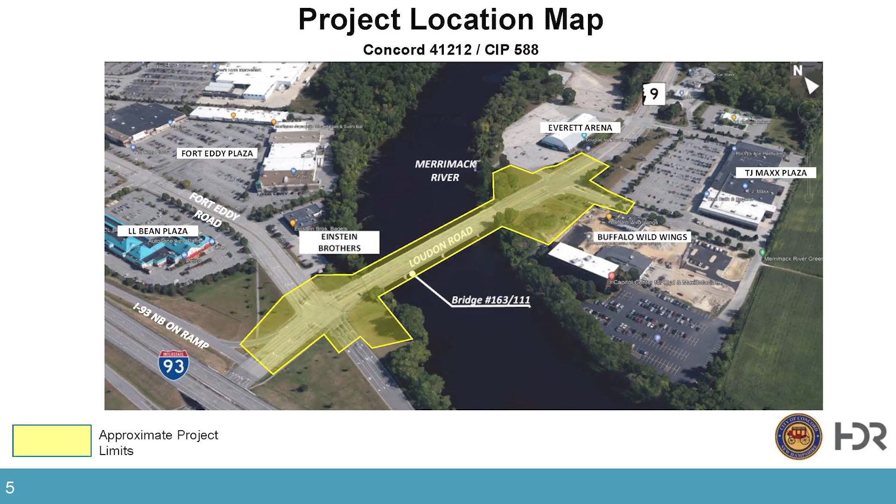Again, I mentioned the purpose and need - it hasn't changed from our last meeting. We're addressing structural deficiencies; it's what we call a red-listed bridge, and it's been red-listed for a number of years. We want to address the deficiencies with the structure itself. There are also operational deficiencies with how the traffic is working, and we want to address that.

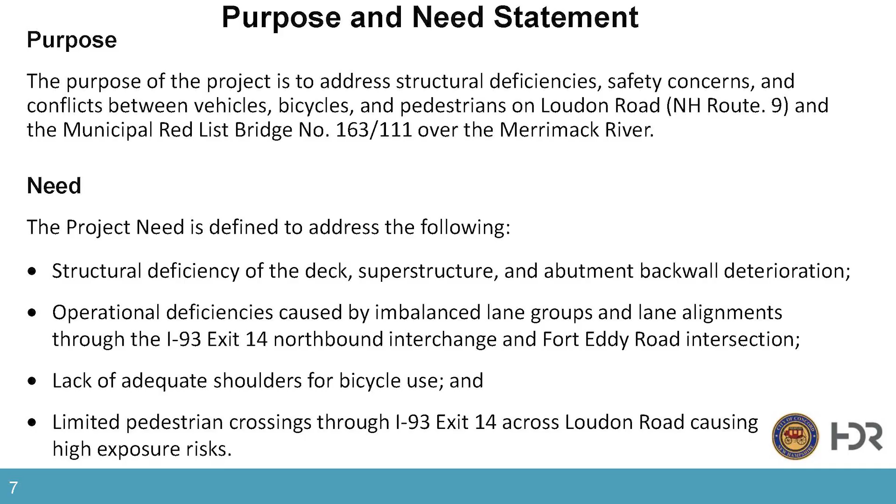Then there are pedestrian crossings currently across the bridge - we have sidewalks, but we want to improve that. We want to improve the bicycle use; there aren't really bike lanes at all, so we want to provide for that. There's also the Merrimack River Greenway Trail that you may have heard about, and we want to provide a connection for it. You'll see that as we get into the design tonight.

So with us tonight from the city, I'm here. I also have a transportation engineer who works with me and the city - she's not here tonight, Karen Hill. And Tony Punton is here with the DOT - he's our project manager, and he's been very helpful as we've progressed through the design to get it to this point.

We also have our design consulting team with HDR. Rock is here - he'll be standing up in a minute to give the rest of the presentation. Keith Coda is here, Nick Karen is also here, Phil Fusco is here, and Kevin Slattery, as well as others on the team here that aren't necessarily on the slide. Audrey's here too. Those are our leads and primary folks heading up the different aspects of the project.

So now I'll skip forward through what we already talked about and get to the project development process. And this is the point where I'm going to hand it over.

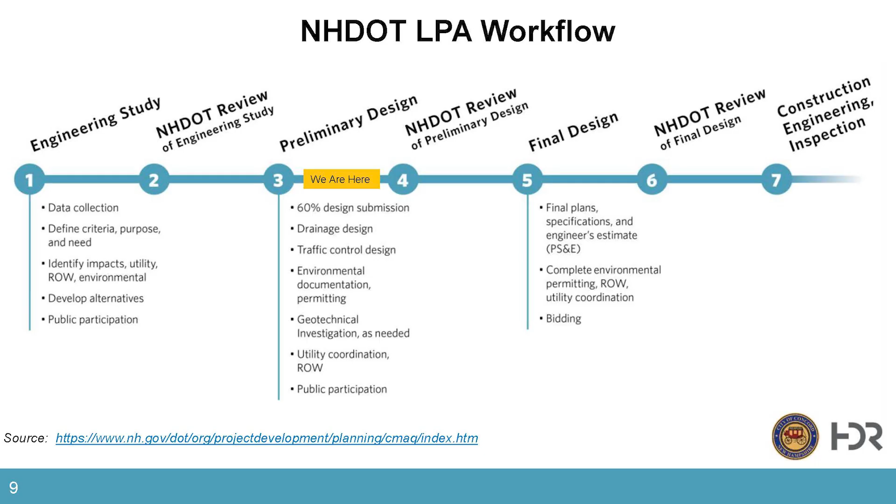You can see all the way up through step 6 and 7. Construction comes way later. We still have to finalize the design here.

So where we are in the project development process, we've already done all of these things up here. We've collected and analyzed all of this data. We developed the draft purpose and need statement that we presented at the first public information meeting. We developed the range of alternatives that we presented at the last meeting. We got input from you folks back in March.

And we've evaluated potential environmental impacts for the alternative that we're moving forward with, and that is still underway as we're going on right now. We'll talk a little bit more about that.

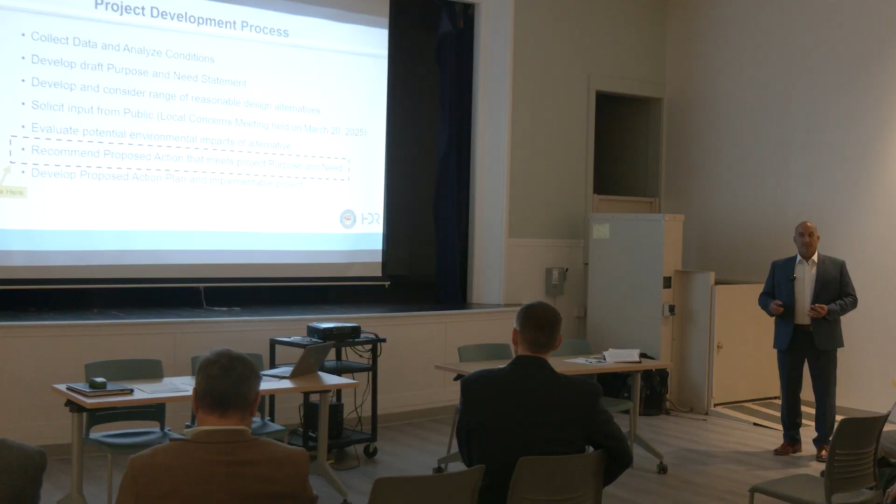So tonight we're looking at the recommended proposed action plan, and that action plan has to meet the purpose and need statement that was developed and presented last time we met. I think one of the things that I want to focus on in that purpose and need statement is a big part of it is enhancing to meet the goals that the city has put out there.

There's a lot of exciting things that are happening as part of this project, and one of those, or a couple of those, are improved multimodal access for a lot of the bike and ped community, improved safety with some shoulder widening, and just enhancements that go into a project like this.

All that said, this is a bridge rehabilitation project, so there's not a lot that we're doing outside of the footprint of the bridge, as Mike said, but we're doing what we can.

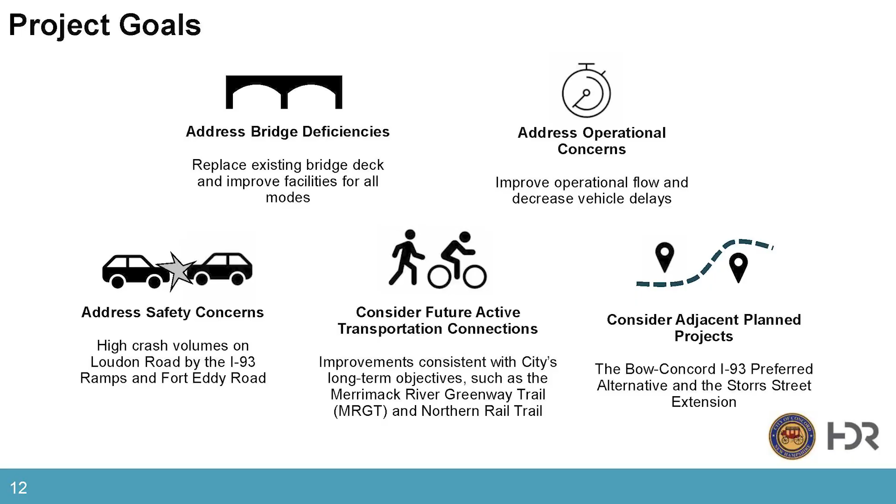So here's where we've been since March. We met with the Bureau of Traffic in August. We talked about some signing improvements along the corridor, showed them what we were going to be doing. There's actually going to be some overhead signs put in adjacent to the bridge, on the eastern side of the bridge.

Coming out of that, we've met with the city on the water line improvements that are being planned as part of the project and that are going to go across the bridge. Section 6F meeting with the city, natural resources - these are all environmental meetings we have to go through to satisfy the environmental process, the NEPA process.

And then we also recently met with Tony and his folks up at DOT with the Estimate Review Committee, to let them know where we are with the current estimate for the project and how programming is going to work going forward. And that brings us to tonight, this meeting here.

So this gets into some of the crash data that I was talking about earlier. You can see that this intersection here at Fort Eddy Road and Loudon Road is the highest accident location in the corridor for this particular area we were looking at - 21 crashes per year between 2015 and 2024.

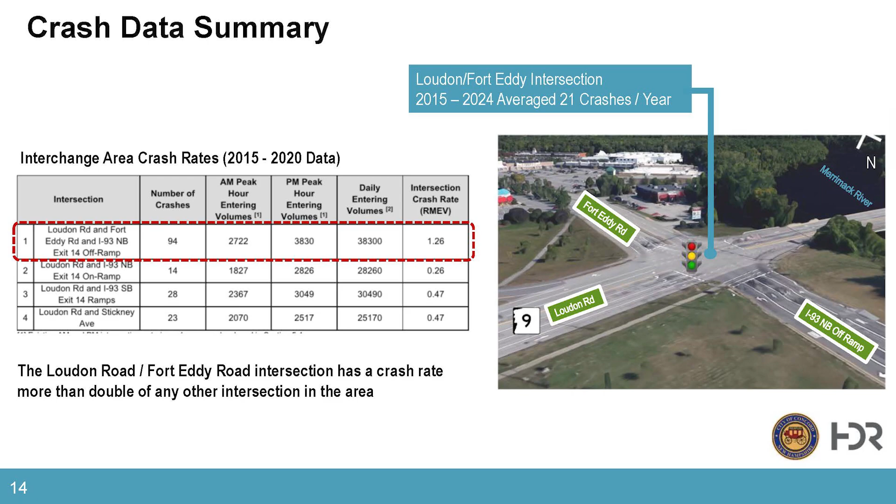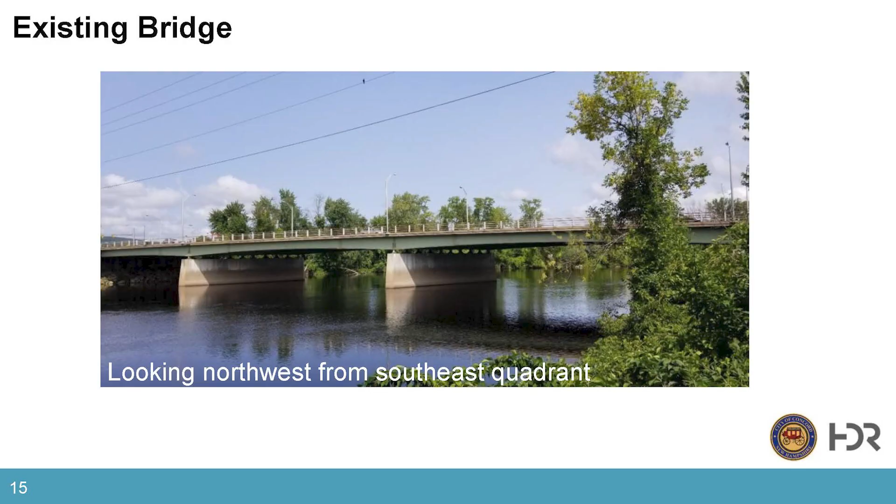This will just give you a view of the existing bridge, looking northwest. One of the things I want to point out here is the piers in the river - you can see that they're tapered from bottom to top, if you know this area you've seen this. We'll get into why I'm pointing that out in a bit. This is the existing roadway.

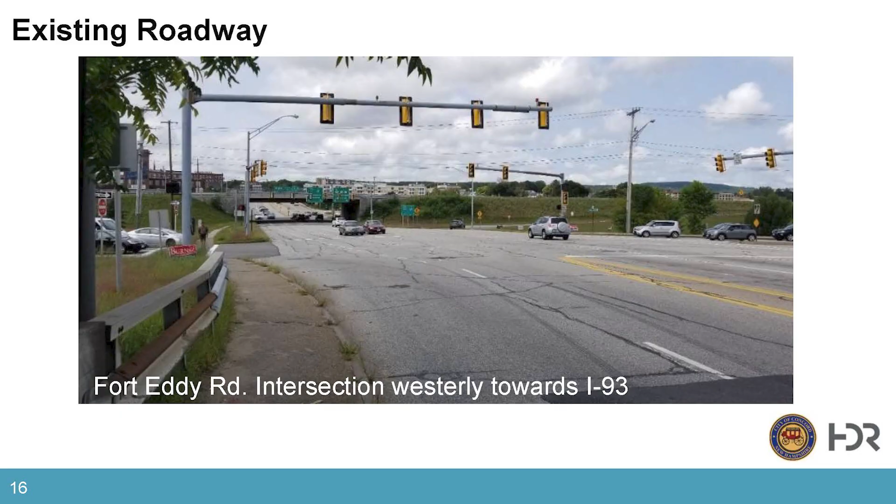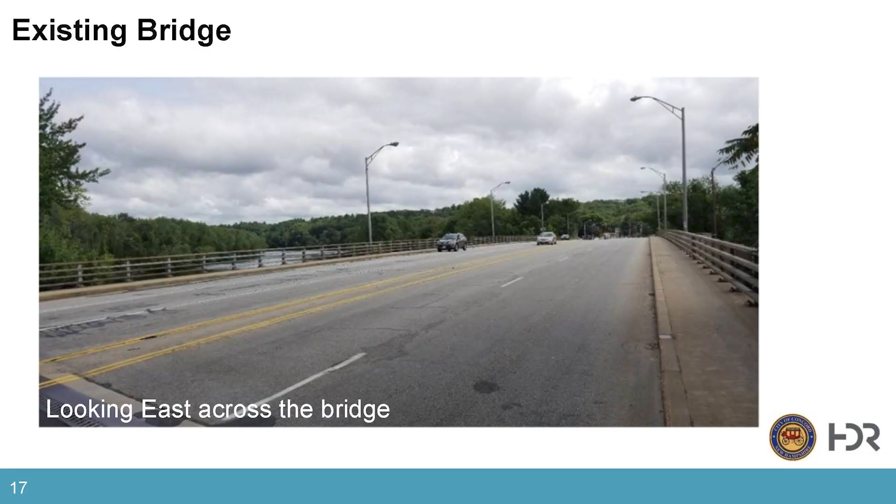This is looking towards 93 from Fort Eddy Road, I'm sure you all know this very well. And this is the existing bridge - notice the lighting on the bridge, the old rail, narrow sidewalks, and no shoulders for any kind of safety or bicycles. Again, the existing roadway, looking westerly across the bridge from Gully Hill Road.

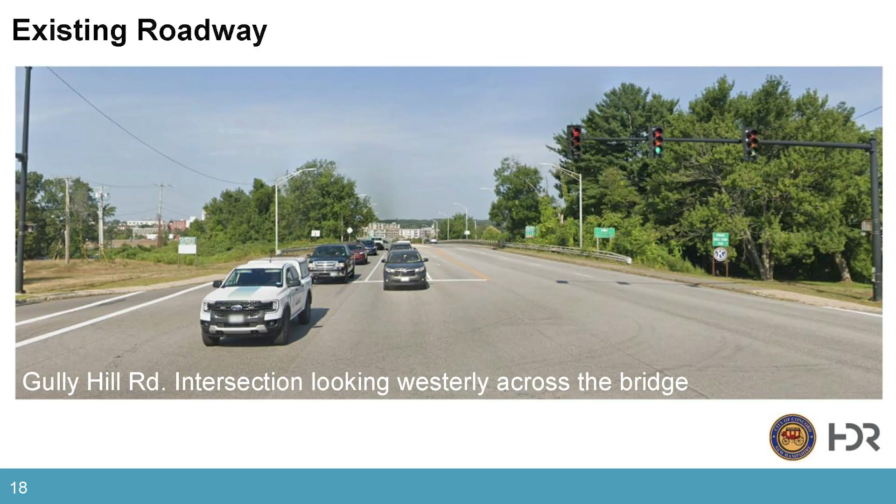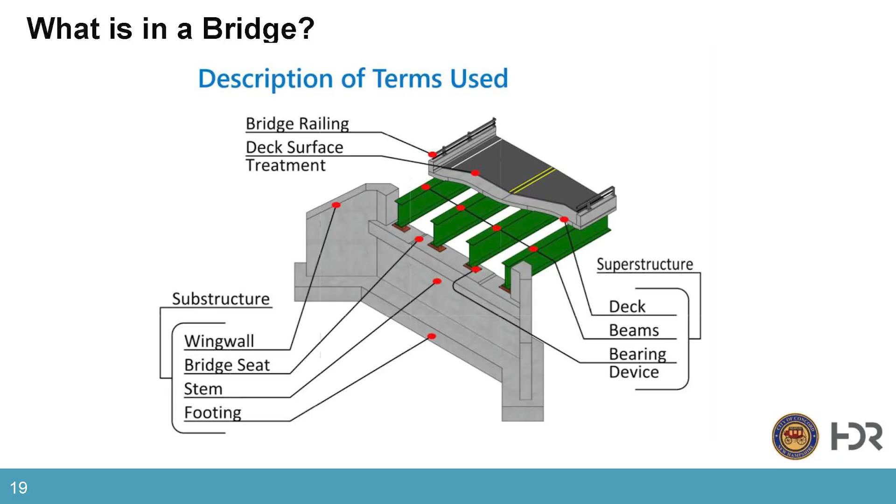What is a bridge? This is to help folks who don't really understand what the components are in a bridge: substructure, superstructure, all of that kind of stuff. So what you're seeing here is the bridge railing, the deck surface that goes on top of the bridge girders - these green things here. They sit on top of the bridge seat, and then you have the back wall and the footing that supports that, and wing walls on either side.

So these are the major components of the bridge that make up the large majority of the cost.

So when we look at a cross-section of the bridge, slicing it right down the middle so you can see what it looks like if you're driving up that way, this will show you all the different components that went into this over the years.

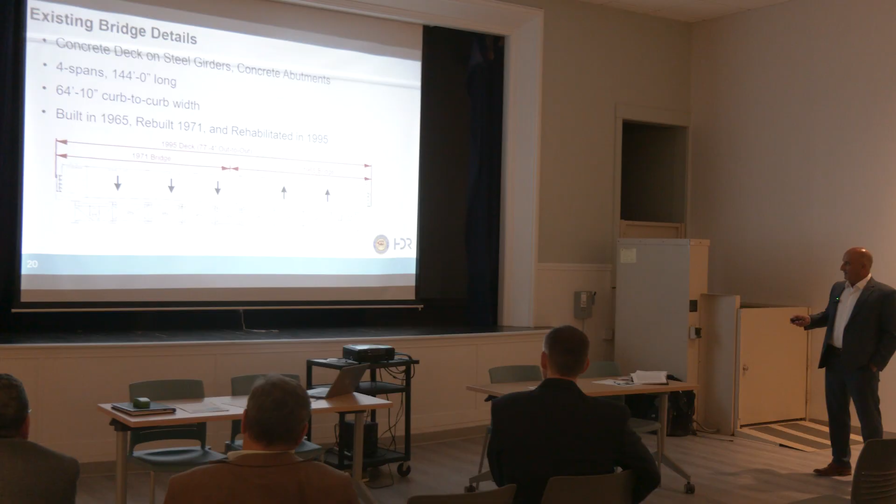It was first built in 1965, and you can see the width here from here to here. Then it was extended in 1971 to add additional lanes. And you can see here this thing in the middle - that's a gutter. So all of the water, if you drive down there, you know what it looks like - you have the gutter right in the middle of the road, and all the water goes there into scuppers, and down into the river.

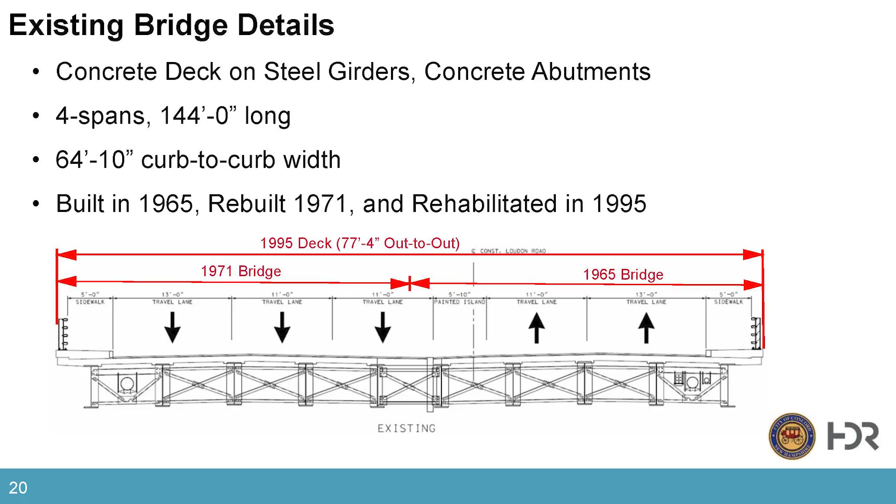So the overall bridge width is 77 feet 4 inches out to out, from the edge of the concrete here to the edge of the sidewalk over here. That's what's out there today.

So, bridge rehabilitation benefits - what are we trying to do as part of this project? Mike addressed some of this already. We're addressing poor concrete bridge deck conditions nearing the end of its service life. It's in tough shape.

We're going to widen the bridge to provide operational improvements, wider shoulders, as well as a shared use path with a separation barrier. There'll be a concrete barrier separating the shared use path from vehicles to make it a little bit safer and provide that buffer.

We're going to widen the piers to support the wider bridge deck. We're going to improve intersection operations on both sides of the bridge to the extent that we can. We're going to connect the local trail network. This is one of the goals and objectives of the project, is to make all of those connections to the trail systems. And we're going to replace the bridge rail and approach rail for the bridge.

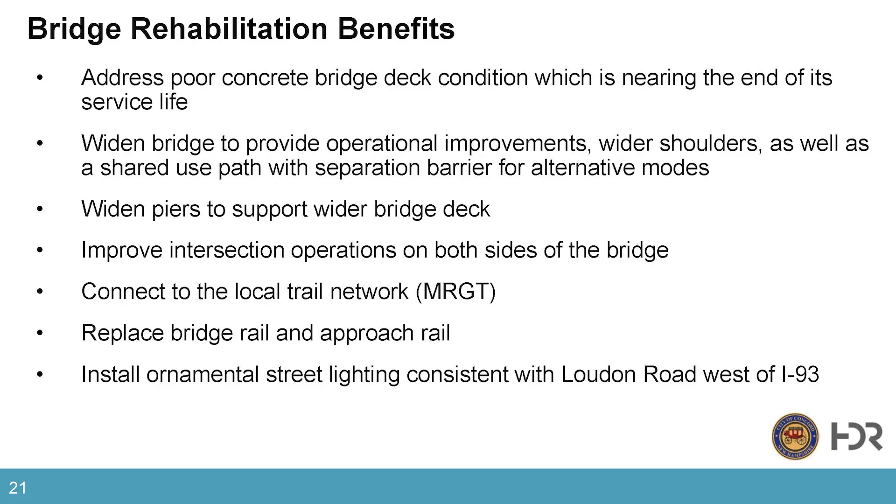One of the last things, we're going to install ornamental street lighting, and it's going to be consistent with the bridge on the other side of the turnpike, on the other side of the interstate. It's the ornamental Amoskeag lighting - they're architectural lights.

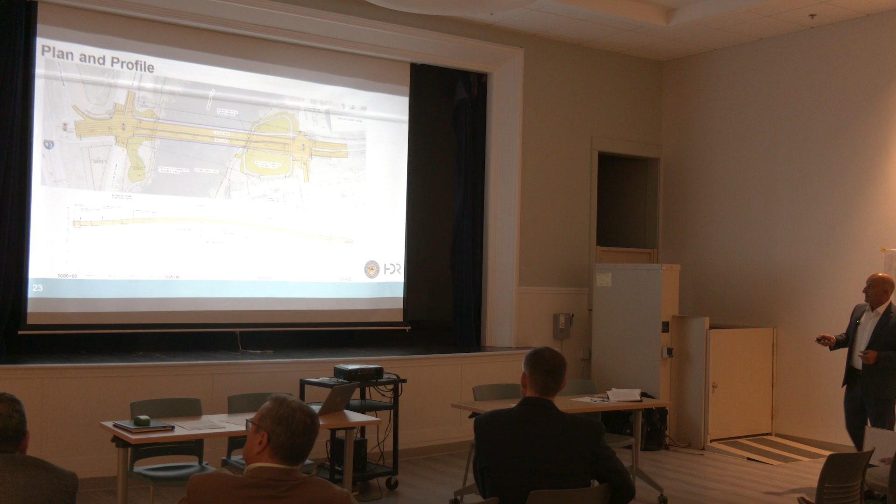That's this area here. One of the major components on this end is the ultimate connection to the MRGT - you can see this purple band here. The idea is for this path to wrap around, coming around off of the arena driveway, coming around down here. The boat launch is right up here, so that's not being impacted. This provides an opportunity for folks, either wheeled or pedestrians, to come down here and pass underneath the bridge. It's one of the major components we proposed last time we were here and showed to you.

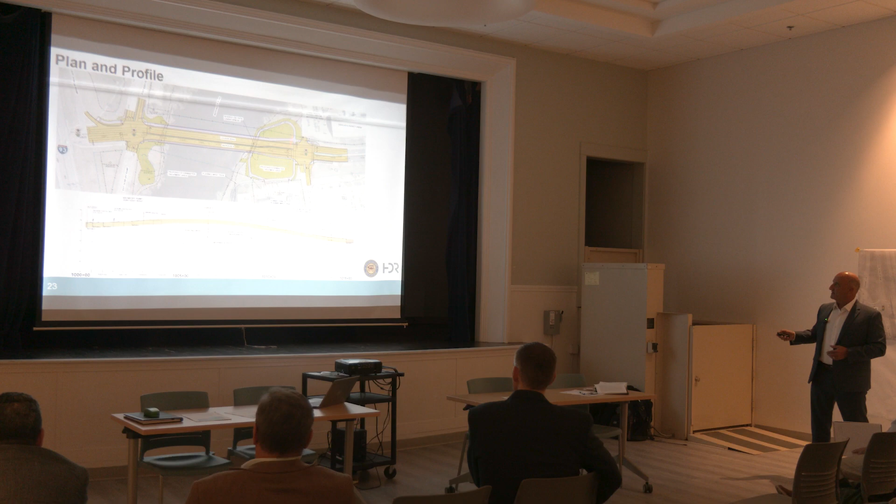So that allows people to make this connection without having to cross Loudon Road here. And what that looks like down here, I'll get into that in a bit. So that is going to provide an ultimate connection here to the sunflower trail, the sunflower field trail down here, and ultimately the city is going to be building that component here and up through this area, and we'll be making that connection when that gets built.

On this side, we have the shared use path coming across here, and this will be an at-grade crossing for the shared use path going across Fort Eddy Road and ultimately terminating up in this area here. And ultimately, it will get built into the Exit 14 plans when that gets built out as part of the Bow-Concord project.

All right, down below here, this is the profile. So if you sliced right down the middle of the roadway here and turned it up on side, this is what the profile of the roadway would look like. So you can see over here, this is Gully Hill Road over here. This is Fort Eddy Road and the ramps over here. Obviously, you have crossing over the river here, and this just shows you the clearance over the river and what the bridge profile is going to look like as you go over the river. This just shows us general relief as you go up and over the bridge.

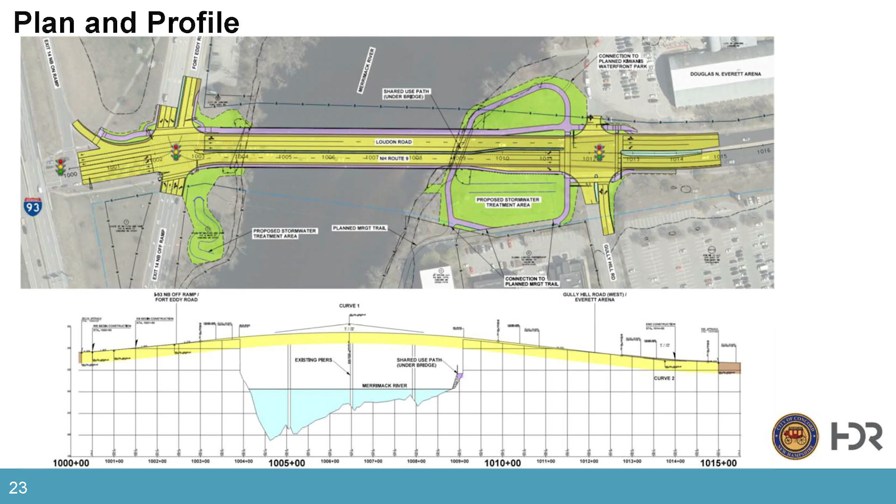One of the things I want to focus on is this right here. If you look at the crossing, the pedestrian crossing here underneath the bridge, this is what it would look like. There's going to be a small platform that's going to be built out here, 12-foot wide, right up against the bridge abutment, the bridge wall back here. And there's provisions being made to carry that shared use path under the bridge here, so there'd be plenty of clearance here for folks on bicycles to cross under there. So that's the intent.

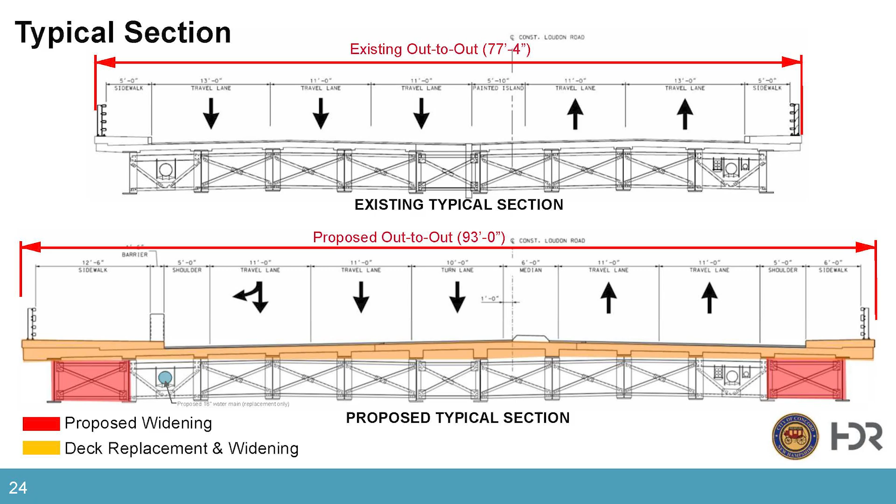So the entire deck will be rebuilt. And over here where you see in red, this reflects the bridge widening. So to make all of this happen and to make it possible, there's a couple of girders that need to be added on either side here - that's what you see in red. So we're going to be widening out on either side of the bridge to make that happen. Blue here, there's some existing utilities here and here. We're working with the city, they're working with us to replace one of their water lines down through there and in through the intersection. And that is going to be carried across the bridge here, basically where it is today, but it's going to be replaced.

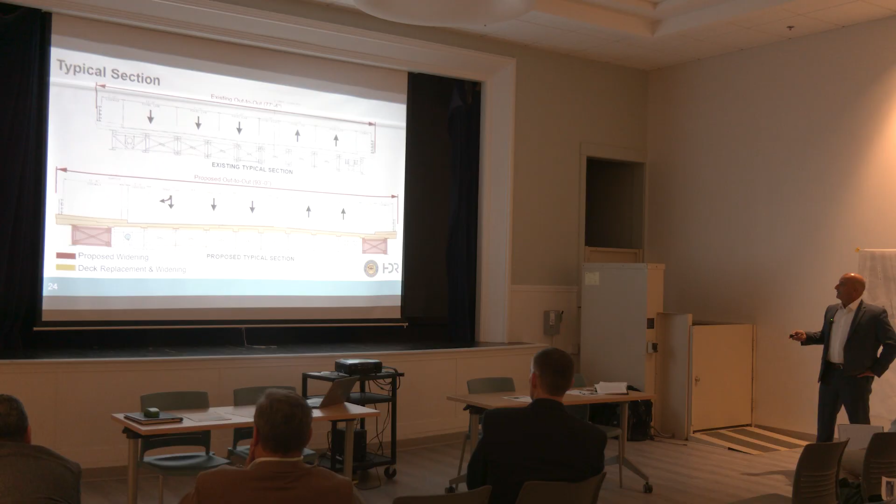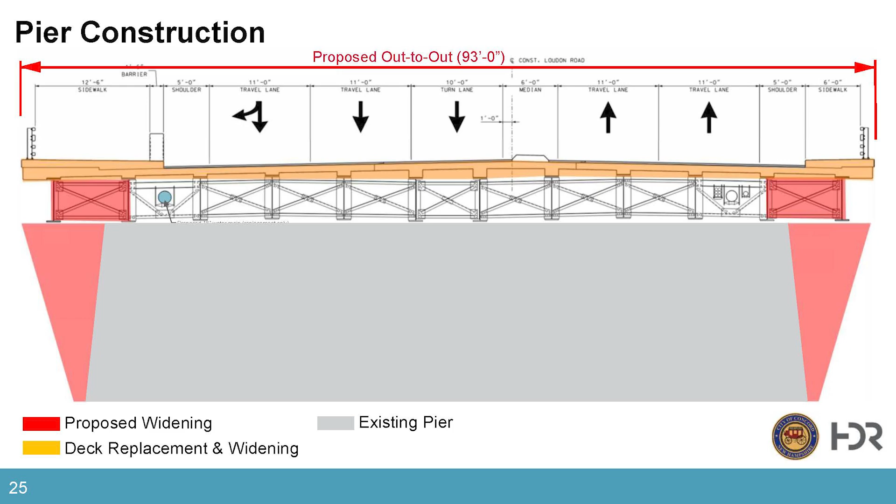Remember earlier when I talked about the bridge piers in the river and how they were tapered up - this is how we're going to widen the bridge without having to go necessarily down into the water and do a lot of work in the river itself. So this is going to reflect some widening of the piers on either side, tapered from bottom to top. So the river would basically be down here, and then the new girders on this side, the widening would be over those pier widenings.

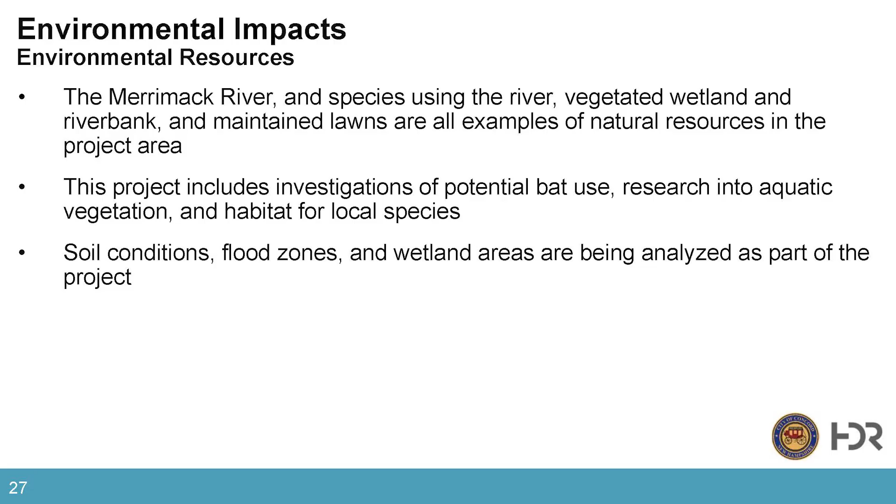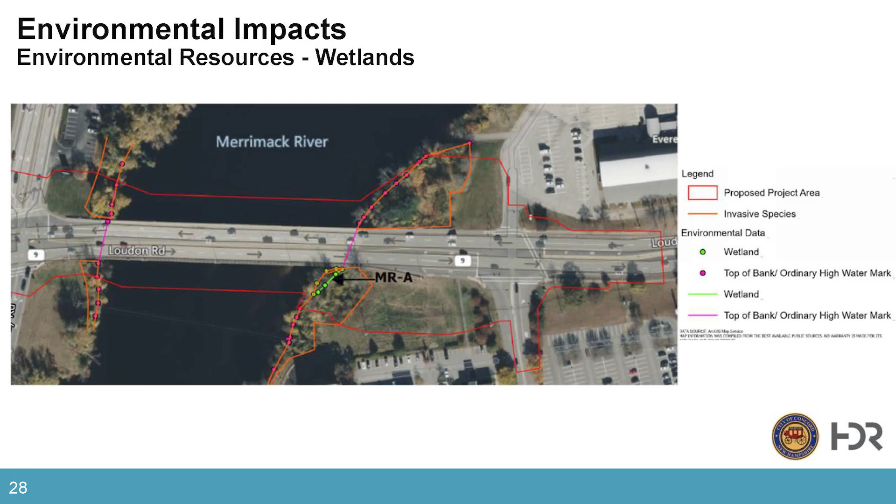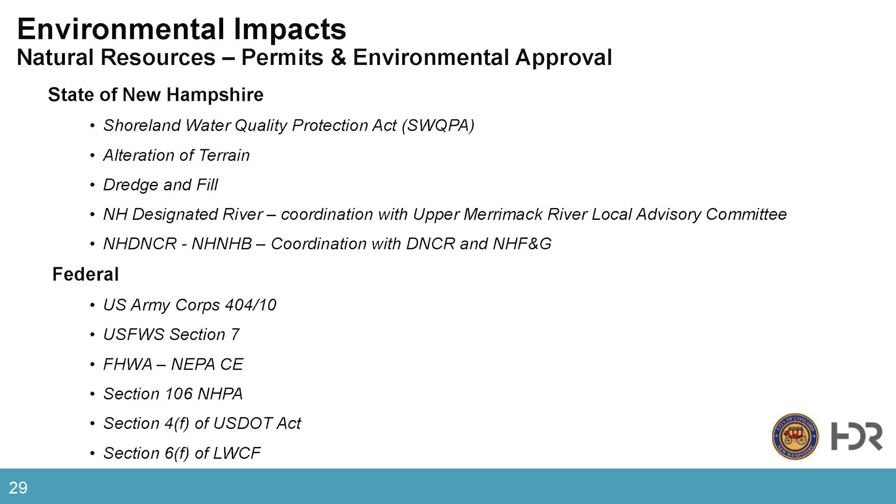And then we're also working with DNCR - Department of Natural and Cultural Resources. And then also federal permits: Army Corps of Engineers, Fish and Wildlife Services, Federal Highway, NEPA CE. This is the big document that we have to clear, as well as Section 106 and 4F, covering cultural, historical, and parkland use.

Cultural resources. To date, we've reviewed cultural resources in accordance with Section 106, historical reviews. The bridge is not eligible for the National Register of Historic Places as it was constructed post-1945 and falls under the post-1945 program comment.

We've also been working with the Division of Historical Resources, New Hampshire DHR, for review of the project. We've submitted our RPR, or request for project review, and are following up on some of the comments that we've had from them.

One of those comments through DHR is that we're going to be performing a Phase 1A or Phase 1AB archaeological survey, which means we're going to be going out and digging some test holes in the ground to look for some artifacts.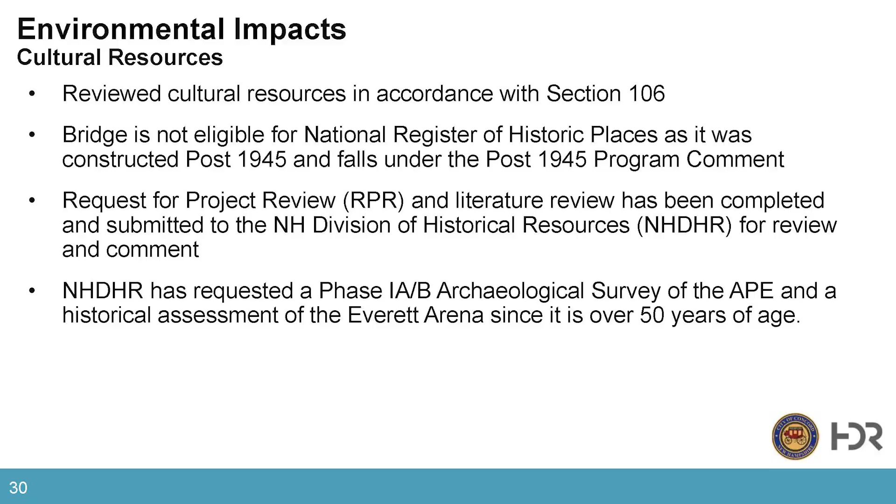And one of the other things that's going to have to be done is the Everett Arena, which is more than 50 years old, so there's going to be an assessment done of that building as well.

Adjacent projects - I think we've already talked about some of this. The projects being considered are definitely in conjunction with the city's goals and objectives, the coordination and connections to the Kiwanis Park. We've been meeting with Parks and Rec as well on what is basically planned for the Everett Arena expansion and making sure that what we're doing is consistent with those improvements.

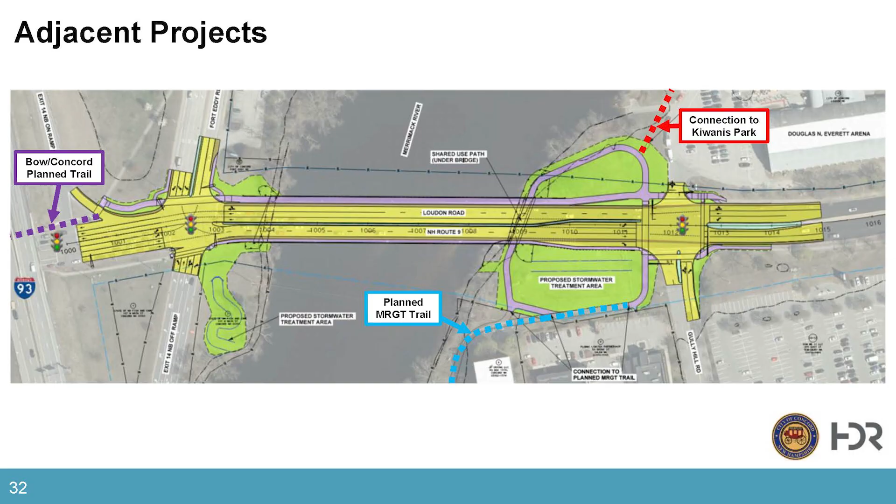The MRGT trail connection here - all of this is being designed to connect to that, and then ultimately connection will be made to the Northern Rail Trail through the Bow/Concord project. So it's not precluded as part of this project; we're trying to set it up so that it allows for the future connections.

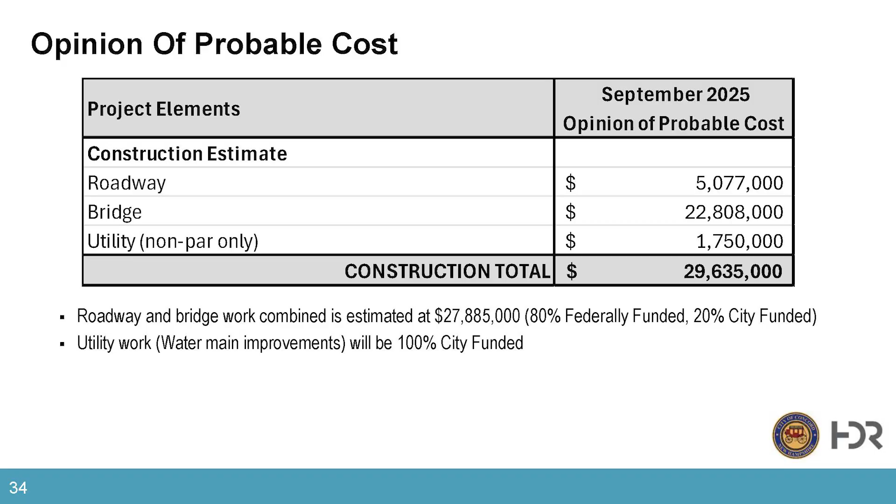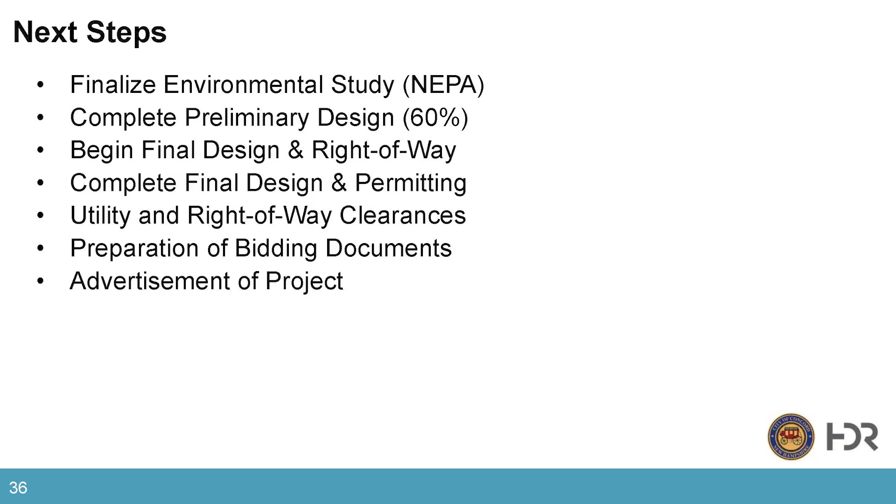Next steps, these are all the things we still have to get through. We talked about the environmental study. Kevin and his group are working on that and getting through NEPA. We're going to start working on the 60% design after this meeting tonight, then the final design after the 60% is done, then move through the permitting process, clear all the utilities, and then look at bidding.

Hopefully we're going to get through the categorical exclusion, the NEPA, National Environmental Policy Act, in the fall of this year. Complete the final design in early 2027, hoping we're through the 60% design submittal this winter, and advertise for bidding. Right now we're targeting the summer of 2027. Construction, all goes well, we'll be looking at fall of 2027.

I know I flew through that. That was a lot of information. I don't know, Michael? That's all I got.

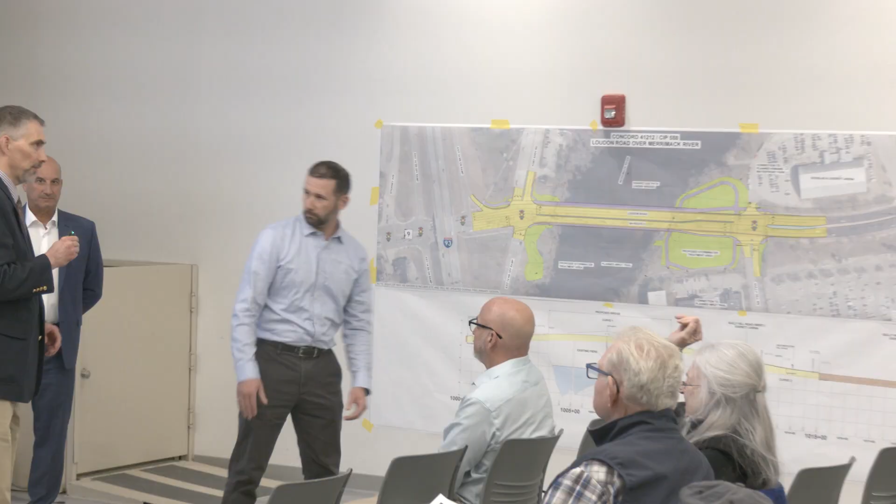Thanks, Nick. As you were answering that, I was wondering if we're taking that extra step of taking a look at a seismic design too. I don't know if you want to mention that at all. Yeah, sure.

As part of the design effort on this, the bridge, being 60 years old now, had different design loads back when it was constructed. The code has since been updated, so there are some aspects where the design codes take a very broad brush and say just use this because it saves time, and it's usually a very conservative estimate for how the bridge is loaded in certain scenarios. When we get into these bridges being rehabbed, trying to get the most out of something that wasn't designed for what's there today, the code allows us to sharpen the pencil and do a site-specific analysis on the bridge.

So with this one, using that broad brush, some of the piers, the foundation elements down into the ground, were a little bit overstressed. So we went back and used the provision the code allows to do a site-specific analysis. We got with our geotech folks, who took the boring information collected out there this past spring and early summer, and came up with more site-specific values tighter to the locations of this bridge. We reanalyzed with that information, and that has allowed us to determine that the bridge will be okay in a seismic event should we get an earthquake.

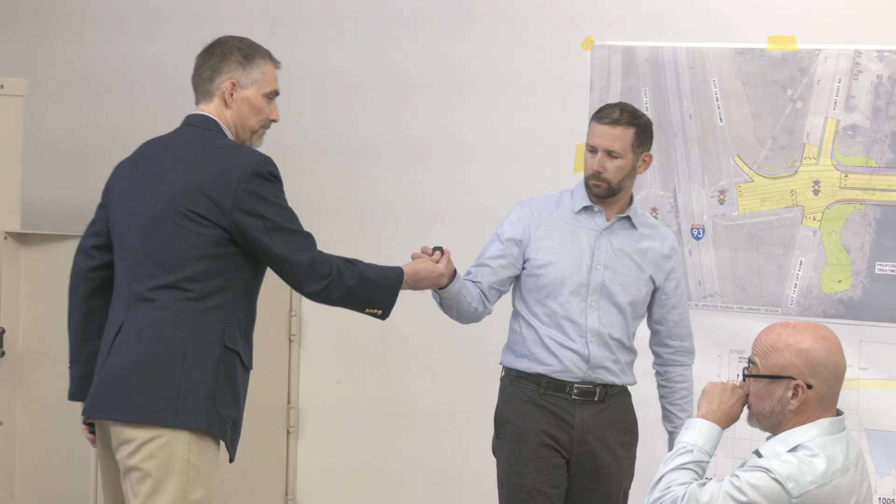Appreciate that. I'm going to go back here. I'll come back out to the front.

You have a question? I don't know if anyone from General Services is here, but what is the plan for snow clearing on the bike lanes to keep those clear so that you're not forcing people back into the roadways?

We haven't really talked with General Services about that yet. They, I imagine, would just clear the road - that's the edge of the road, so they're going to clear the road. We'll have to look at that and how we clear the walkways as well, but we have equipment to do that, so that's the kind of thing we'll be able to come up with a solution for.

Other questions? You had a question? At some point in the future, we are going to be expanding Highway 93. I'm curious about how that project is going to impact the work that has already been done here on Loudon Road.

Okay, so you're looking for overlap. One of the things we've done as part of the project is we've consulted with DOT to make sure that whatever we're doing in this area doesn't preclude what has to happen for exit 14. We've definitely been in coordination with the project team, with DOT who's working on that. We know this whole area is going to look very different when that project comes through. They're talking about eliminating the northbound on movement from this direction, however keeping that southbound on ramp right there, but we know all of this is going to change significantly. One thing we know is going to happen as part of that project is the bridge here is going to be widened, allowing for better geometry under the bridge, as well as shoulders and a shared use path, which is going to continue from here on out. So that is being accommodated as part of that project and the overall bridge width through that corridor. These are all things we've thought of and talked with DOT about, so we're not going to lose anything - everything we're doing won't preclude what's going to happen, and what they're doing is not going to preclude what we're doing as part of this project.

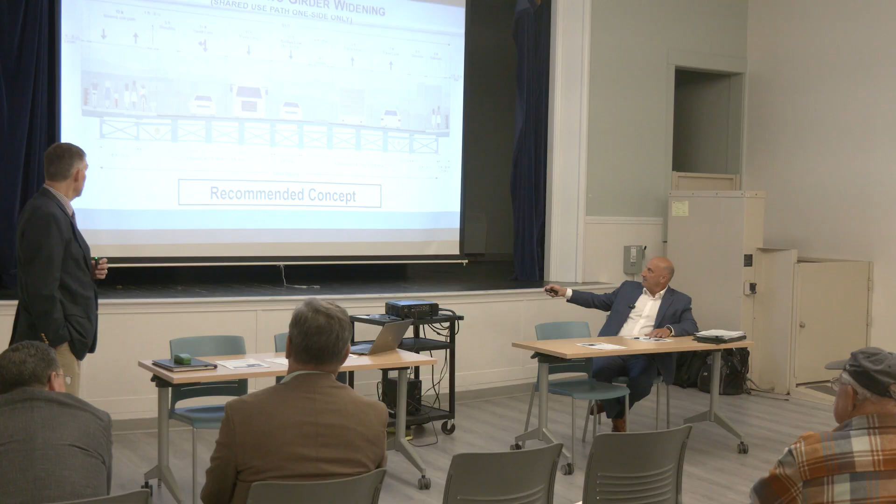The width of the shared use path, as you see up here, this is what we presented in March. It's a 12-foot clear path, and that includes, it's still 12-foot clear, right? Yeah. So we get the concrete, so there's a barrier here, and again, this is what we presented last March, so we've kind of taken it from there. So you get the barrier here, 12-foot clear, and then you have this width on the outside.

I think a 12-foot width is desired from a shared use path perspective. We really don't like to go below that for bi-directional use with those multimodal uses. So that's the recommended width.

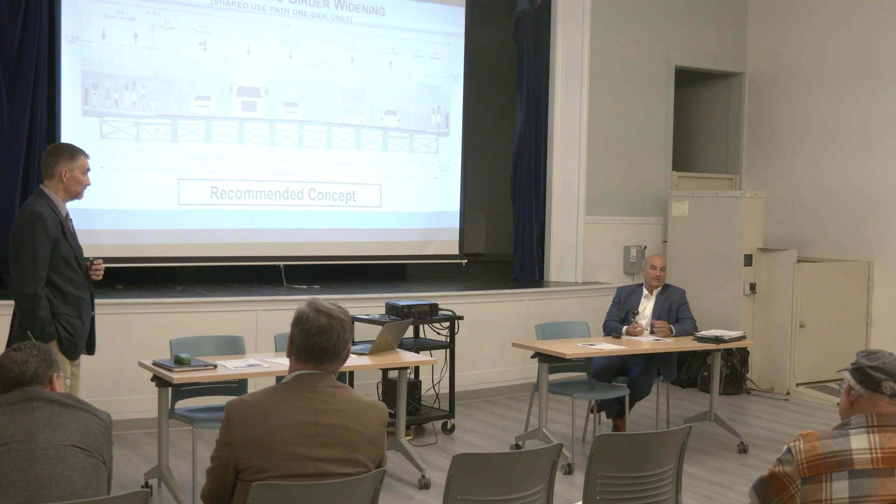Could we save a couple feet and shave it down? I'm not sure what that would result in for cost, but right now the recommended alternative is to go with the 12-foot wide, because that's pretty typical for that type of path. As far as snow removal, probably some kind of Bobcat, not a pickup truck. All of that loading has been considered as part of the bridge design. If we were to reduce something on that part of the deck for the snow route, it wouldn't make much difference, since what we have to design for supersedes that kind of loading criteria anyway.

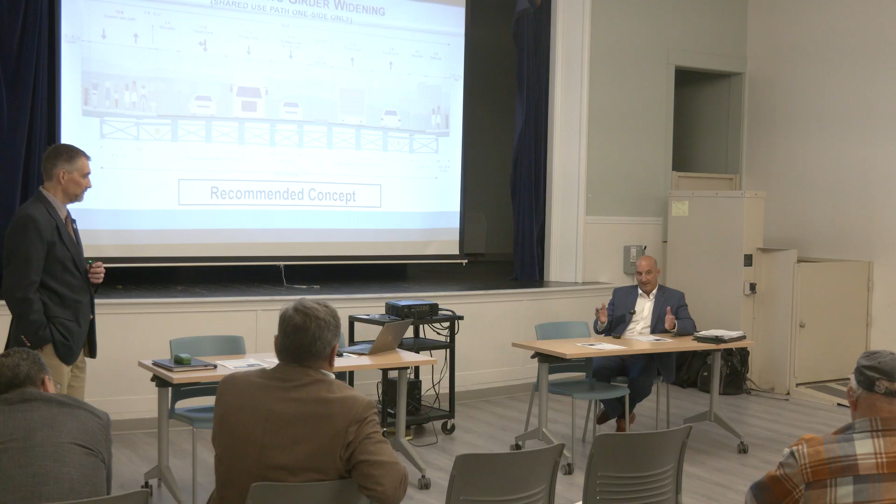The at-grade crossing at Fort Eddy Road, yep, not great. I think an overpass, we talked about this last time. It's a little bit outside of the scope of this project and will result in quite a different project with impacts to other areas. This is a bridge project that we're trying to push through, and we're trying to get as much as we can out of it to meet the goals and objectives of the city's uses, making connections to the MRGT and the Northern Rail Trail. But we have to work within the confines of the scope of the work, and putting a bridge over Fort Eddy Road doesn't fall within that. That would be a whole different type of project.

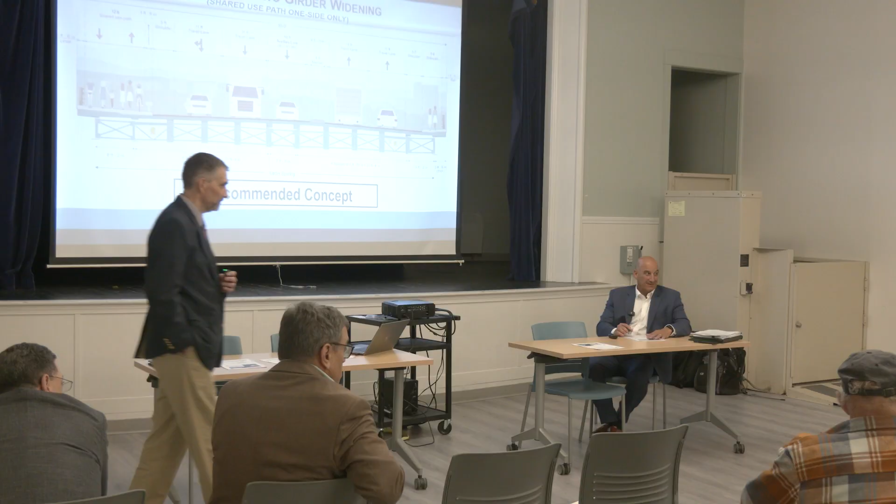I don't know if that's something you want to talk about. I would agree, this is at its heart a bridge project. An overpass would impact private property to the north, going over and coming back down, which would be ideal, but the city is more than welcome to construct it themselves. It would not be included as part of this project from a DOT perspective. Definitely not going to argue that. I think a lot of people here would love to see that, but if you're talking about trying to reduce cost of this project, that would not be one of those ways.

I acknowledge that would not reduce the cost, but I was hoping for comments from DOT saying yes, conceptually, reduced traffic safety issues, improvement there, fewer pedestrian crossings - yes, more money, but maybe collaboration with the folks doing I-93, McFarland Johnson, so that we can leave basically a footprint such that they can do it as part of the I-93 expansion. I really think leaving the door open is that critical. Thank you for your comments.